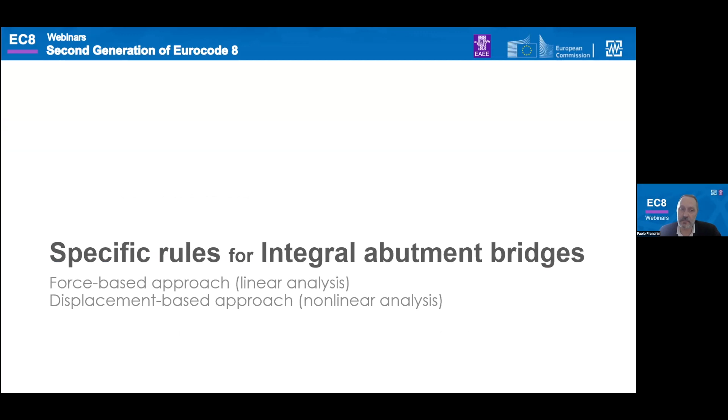Integral abutment, cable stayed, and extradosed bridges. These are clauses 9 and 10. Clause 9 on cable stayed and extradosed bridges is very short, 2 pages. I will deal with it at the very end, and I will focus on the more substantial clause on integral abutment bridges. So first of all, the scope.

Clause 10 should be used. Let me see if I can... yes, here, sorry, is the pointer. It applies to integral abutment bridges, but it's also permitted its use for semi-integral abutment bridges.

Semi-integral are bridges like this, for example, but in reference to the presentation by my colleague David, these are all those bridges where an abutment is connected with the deck and exchanges forces, so that deck vibration engages the backfill or natural soil behind the abutment. So not just this example, but there are alternative examples.

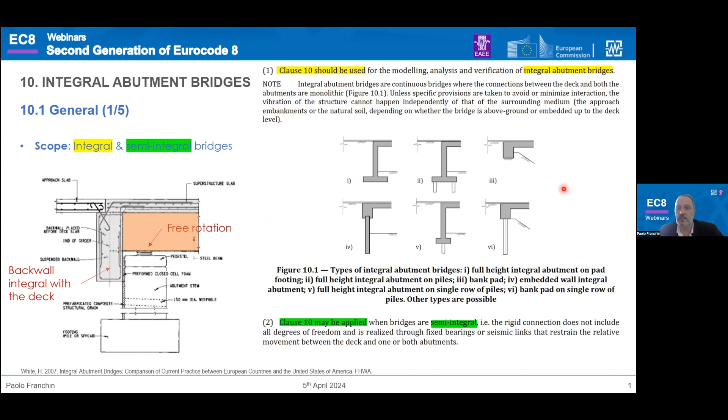There's a very large number of configurations for integral abutment bridges. Some are shown at the beginning of this clause. What is important to keep in mind is that whatever the configuration, the specificity of these bridges is that soil structure interaction is something that, unlike other bridges where you can sometimes model them as fixed base, here must be considered - it's a distinctive feature of these bridges.

So the global dynamic equilibrium of these bridges, the vibration cannot happen independently of the surrounding medium, unless the clause says specific provisions are taken to avoid or minimize interaction. When we say something like this, what we mean is solutions that have also been tested in shake table tests, exploring, for instance, having compressible inclusions right behind the abutment wall.

So in these cases, of course, the interaction with the backfill is limited, and the method that I presented in clause 10 needs to be modified.

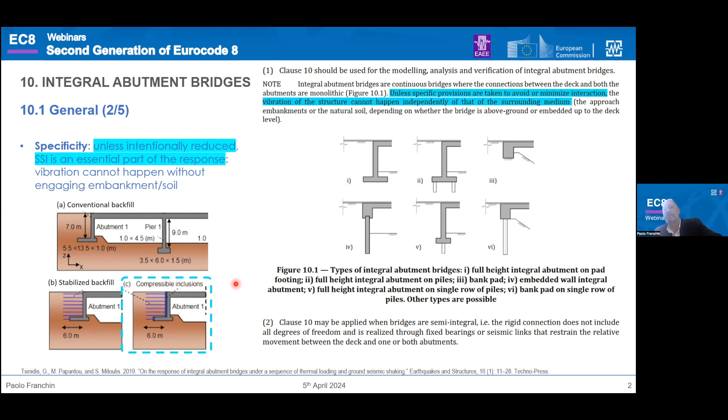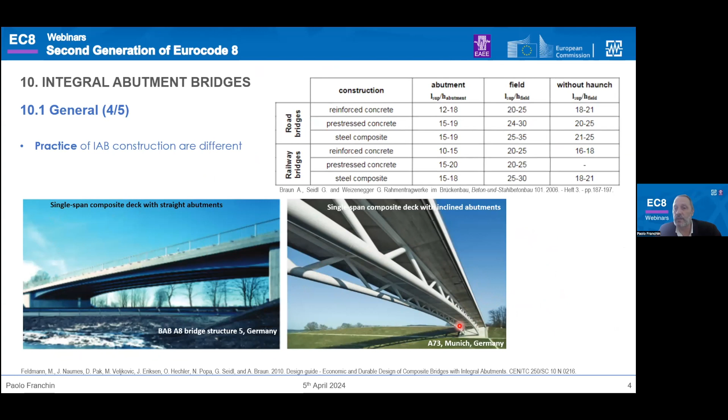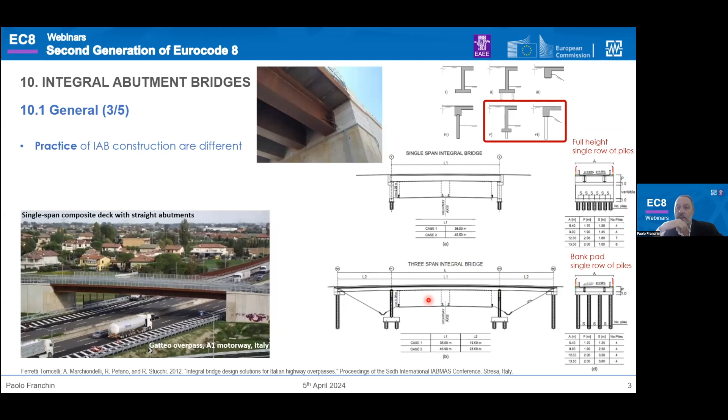And I should have mentioned that in the 3-span case in Italy, where I'm speaking from, it is common to have the deck sliding over the intermediate piers, but there are also cases, like the Slovenian practice, at least I'm aware of, where the deck is in concrete and the piers frame are monolithic with the deck.

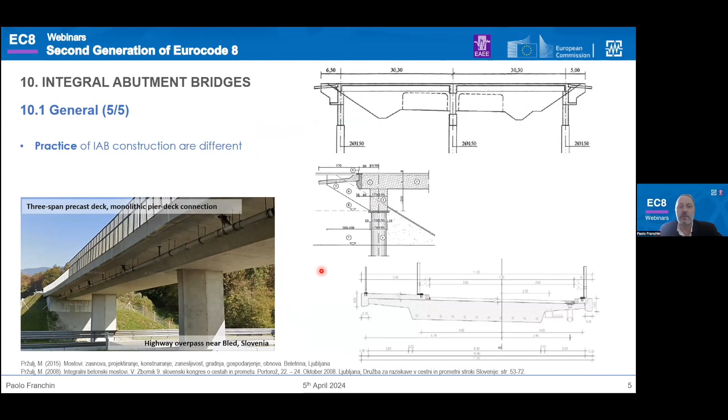So this clause needs to cover all these cases. So let's go to the basis of design.

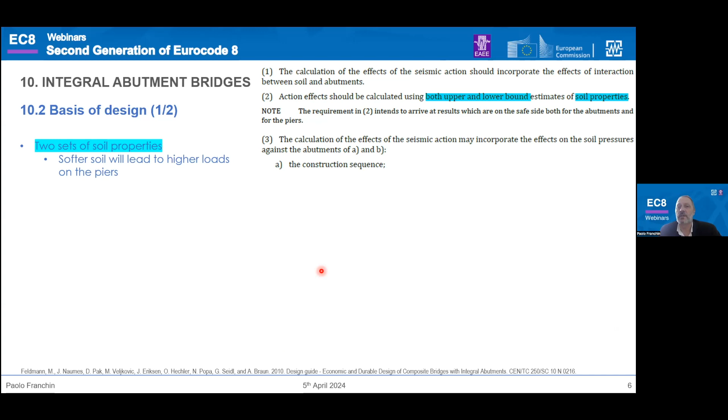Since interaction with the soil is an essential part of the response of these bridges, like it usually happens when you have to deal with soil that is more difficult to characterize than artificial material, it is wise to use upper and lower bound soil properties.

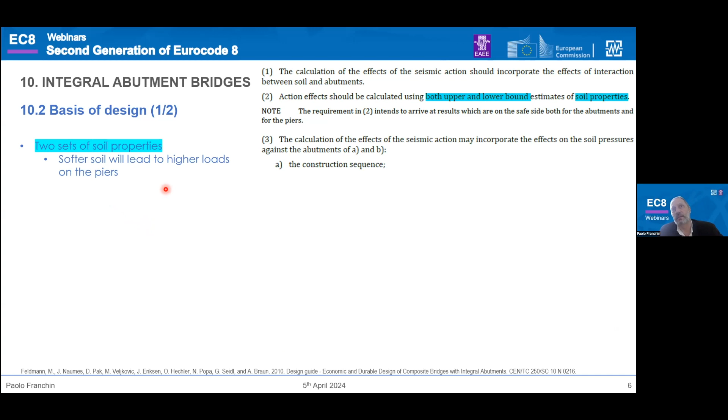So you need to analyze everything with 2 sets of soil properties, because, for instance, considering lower mechanical properties for the soil will increase the loads carried by the piers, especially when they are monolithic with the deck, and higher mechanical properties will increase the internal stresses on the abutments. So you need to consider two. This is a should, a recommendation.

Then there is a permission to include in the calculation of the response the effects on the soil pressure of the construction sequence. This is important - true in general for all large structures, but in this case, even if they are not large, for these bridges, the construction sequence influences the internal forces at the end of construction, and this may lead to different initial states of pressure behind the abutments.

And thus influence the starting point for the dynamic analysis. This is mainly something that you can do when you perform a displacement-based analysis approach and perform a nonlinear analysis. In the simplified force-based approach, you cannot consider this.

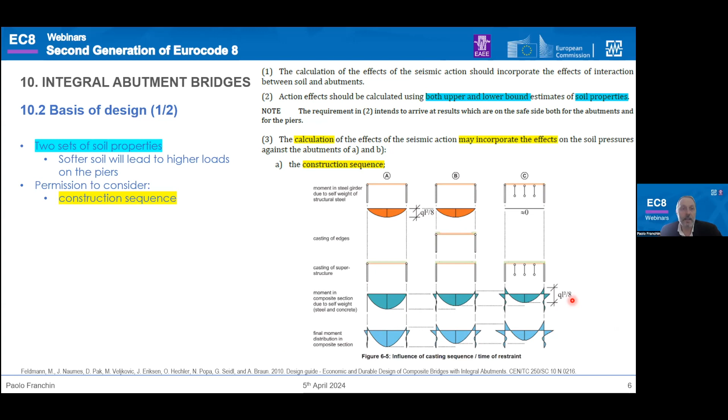You will see why. Also, there is a permission to incorporate the effect of thermal cycling. Actually, now we are dealing with the seismic design situation for this type of bridge, but most of the initial research on these bridges dealt exactly with this problem - the fact that these bridges are in contact with the soil at the abutments, and through seasonal variation, winter, summer, they have compression, elongation and contraction of the deck that brings interaction with the abutments.

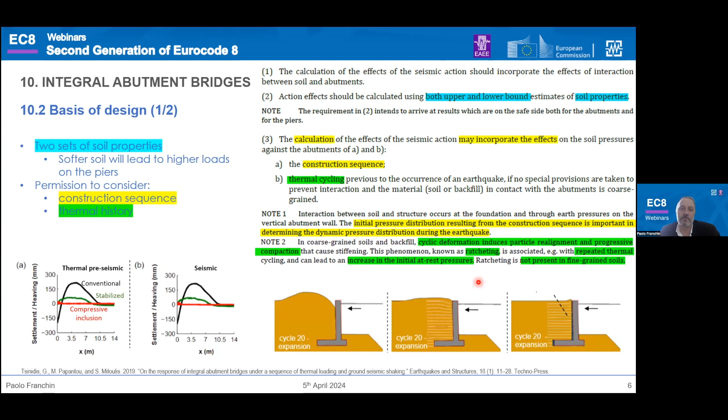And depending on the structure of the backfill, you can have, in a number of cycles, considerable deformation, increase of the pressure behind the abutment, and deformation of the soil. This is an example from work exploring this. So depending on the type of backfill you have, you may want to include these cycles before the seismic analysis for the displacement-based approach.

Now, whatever the method of analysis, the main feature is the interaction. The actions should come from the kinematic compatibility between the soil and the structure. This means there are displacement-dependent soil structure, soil pressures that need to be accounted for.

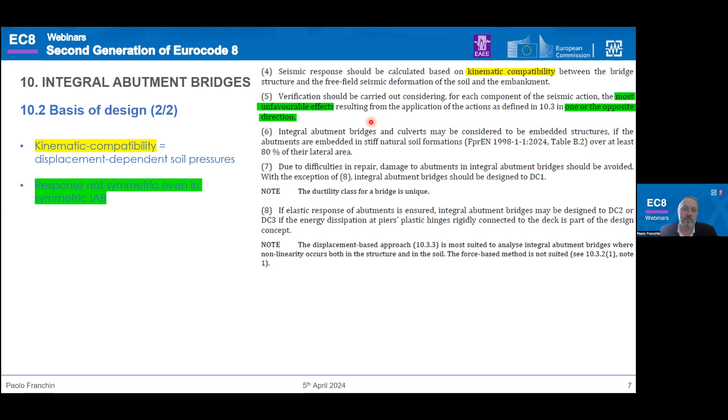Further, even for a symmetric bridge, the response is not symmetric, because the bridge will move away from the soil on one side and lean against the soil on the other. So you need to consider both directions. You cannot just mirror; you have to consider both directions of analysis as usual.

And this is a very important aspect, consistent with what I was saying at the beginning: critical zones, areas where energy dissipation occurs, should be easily reachable for the purpose of repair. Typically, especially if you have tall abutments, these bridges' abutments are not easily accessible for repair unless you dismantle the entire embankment or portion of soil behind the abutment.

So the target performance set by the code for these bridges, for the abutments and therefore for the whole bridge, is a quasi-elastic response. This is a very important statement. And therefore, you have to design the structural part of the bridge for DC1.

The exception to this is when, like in the Slovenian practice, you want to use energy dissipation in the plastic hinges of the piers as part of your design concept. In that case, you can design these hinges, only these hinges, provided you still have quasi-elastic response in the abutments. You can design the piers for plastic hinging to DC2 or DC3. Of course, this requires some manipulation to do with the force-based approach, since the code doesn't say how. The best approach, if you want to design a bridge like this, is to go for the displacement-based approach.

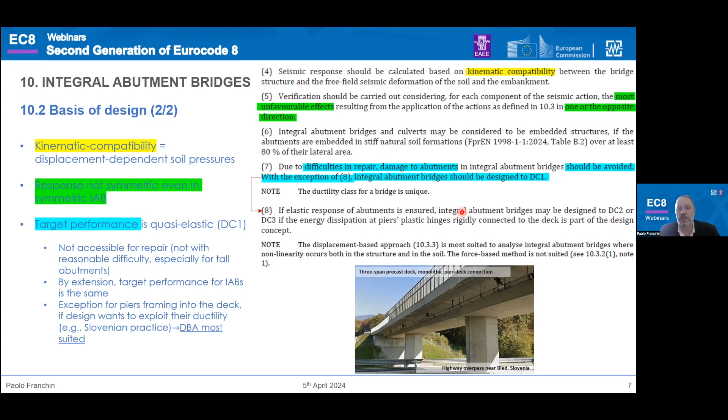So two methods are presented for analysis of the action effects: one is the force-based approach, and the other is the displacement-based approach. Starting with the force-based approach, consistent with the target performance which is DC1, one can use a Q factor of 1.5, which basically coincides with QS, the overstrength factor.

Note one important aspect of this: the design of these bridges, since the response is the result of the interaction between the bridge and the soil, we are not using the reduced spectrum like we usually do in the force-based approach. So we are not dividing the spectral acceleration by the Q factor. We are using the full spectrum, to find a configuration of equilibrium between the inertia of the structure and the soil pressures. Then, for the purpose of designing the structural elements, we divide these internal forces by Q.

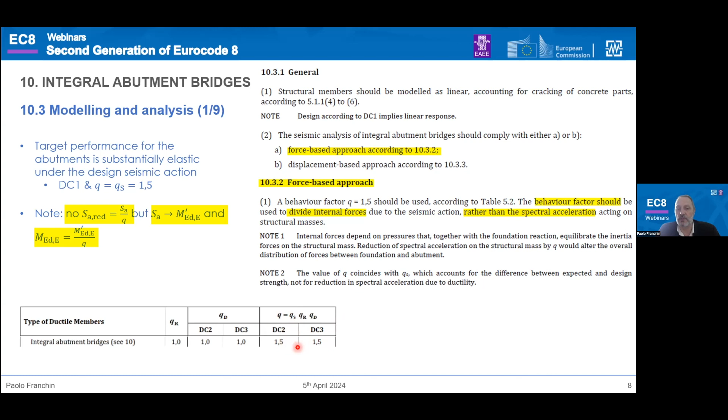In the end, for the structural members, it's the same, but the displaced shape and the pressure on the soil will be more realistic. This just shows internal consistency: the fact that for these bridges, even for DC2 and DC3, now you understand why the total Q is equal basically to QS, equal to 1.5.

So how do you perform the force-based approach? You have to apply total... so rather than modeling the soil in the force-based design approach, you replace the effect of the soil with earth pressures. So the problem is how to decide this earth pressure.

Now, this earth pressure in the code - you don't need to superimpose the static pressures coming from the construction sequence. It would be difficult to determine, especially because of the phenomena we talked about before, and the seismic one, like it is sometimes done for retaining structures.

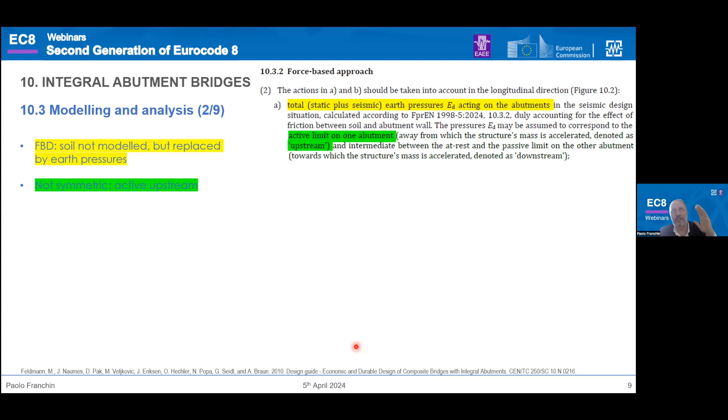What you need to do is apply a total static plus seismic earth pressure acting on the abutment. Now, these are not symmetric, because the bridge moves away from the soil on one side and leans against the soil on the other side. So on the upstream, or moving-away side, you very easily go into the active limit pressures, because the displacement corresponding to activation of active limit pressures is small, while on the other side you go to some state of passive pressure.

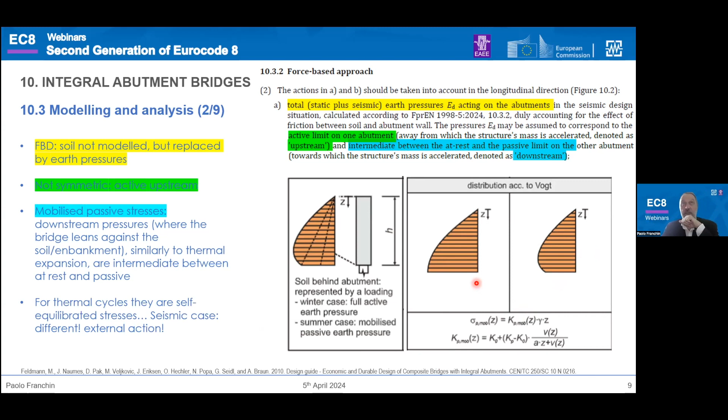Now, for the thermal cycles of contraction and expansion, these are self-equilibrated stresses, so you need iteration. The seismic case is different because you do have an external action, something pushing the structure against the soil. So in a way it's simpler - you don't need iteration. What we do is start from the intensity.

The higher the seismicity, the higher the seismic force pushing the deck, the structure, and the abutments towards the soil. We normalize this intensity. Please note that the inertial forces on the structure that you need to apply are equal to the mass of the bridge times the plateau spectral acceleration S a.

Now this is a considerable simplification. The reason for doing this is the following: first, there are a lot of nonlinear dynamic analyses that have been carried out to support this, and this is from a parametric study with a number of bridges of this type with different numbers of spans. I will show more later.

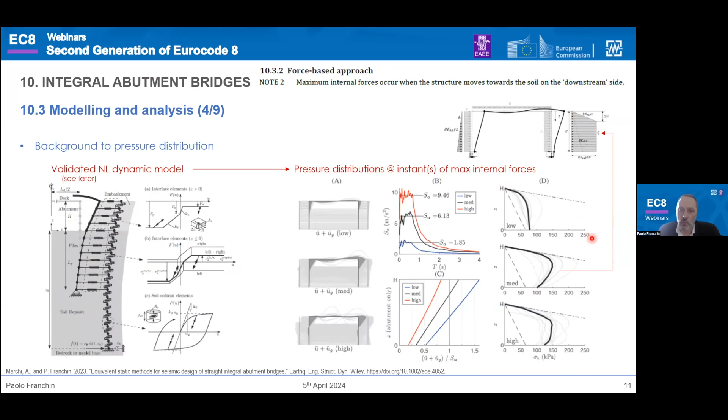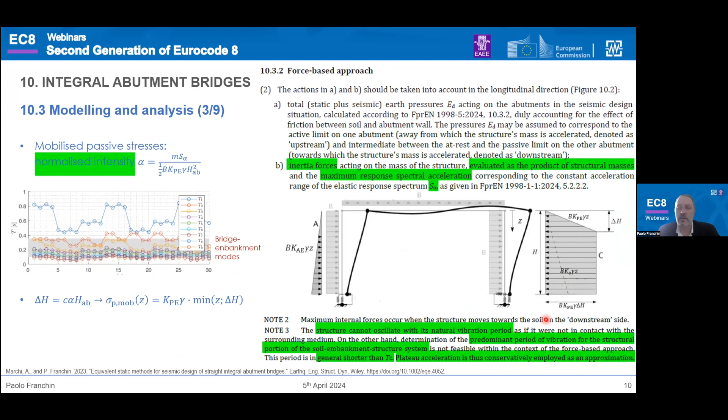And what you get, as reported in the previous slide, is that you have maximum internal forces when the structure is leaning against the downstream embankment.

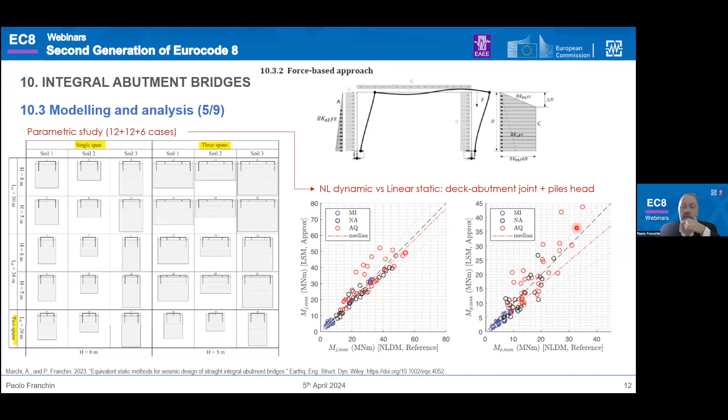A parametric study of a large number of cases was carried out - single span, 2-span, 3-span bridges, different pile lengths, different soil profiles - and the results of this linear static method with equivalent stresses were compared against nonlinear dynamic analysis, and as you see, the correlation is quite good.

As I said, the foundations need to be included, of course. Otherwise, if you model this as fixed base, it will not lean against the embankment. This is one case where you also have to include the foundations, and you can do this according to Part 5, Annex D, which gives expressions for foundation impedances. Here, just as an example, I'm showing expressions for single piles, but the foundation might be shallow.

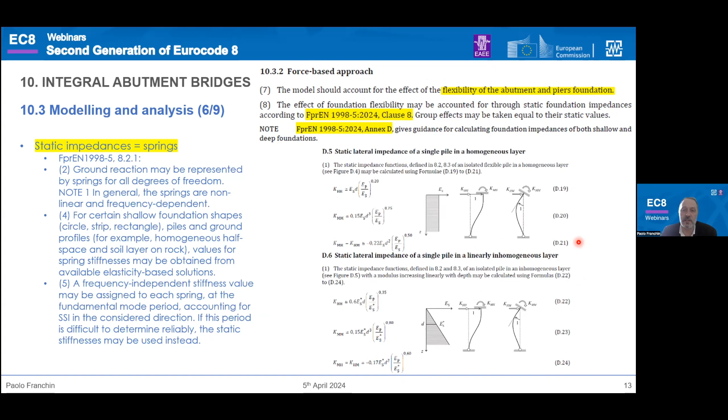As we've seen, there are different ways of building an integral abutment bridge. And of course, what is important to recall is that if, for instance, you have piles, then you will get forces in these impedances, the springs, and then you will have to apply these forces to an appropriate model for your piles in order to determine the internal force distribution in the piles.

This is important because it's not necessarily at the top that you develop the largest internal forces, and you may even develop internal forces that are too large in terms of required reinforcement, so you need to increase the number of piles, even if from a geotechnical point of view, under static loads bearing capacity and settlements, the piles are enough. You may need to increase them for the inertial forces.

What else? The transverse direction. It's mentioned, but it is much easier because most of this interaction occurs in the longitudinal direction of the bridge. This is true in almost all cases, but you have to pay attention for those cases where...

So if you need to carry out the analysis in the transverse direction, you just have a deck that is restrained by abutments that can be considered rigid over their height in this respect, and consider the rotational stiffness of the group of piles. This is what is said here in this point 11.

Unless, of course, your abutment is quite flexible. There are cases where integral abutment bridges are built using as an abutment a sheet pile retaining structure. In this case, this assumption needs to be relaxed, and you need to account also for the flexibility of the sheet piles. You can do two separate models, but in the case of skew bridges, you need to use a spatial model.

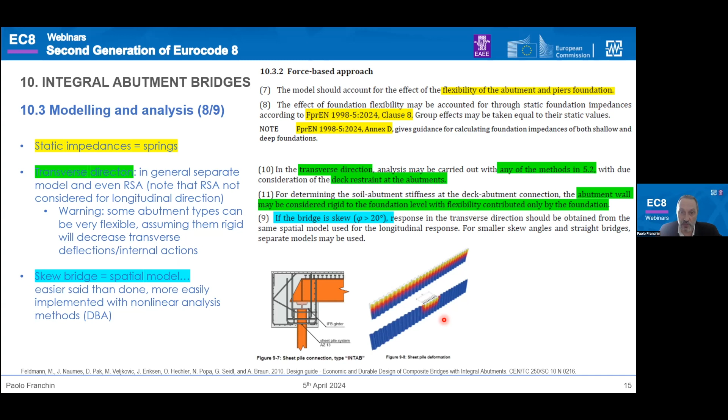Now, going to the displacement-based approach, this is treated in a very short, compact manner in the code, because most of the material is in an informative Annex D. This approach is implemented either through nonlinear static analysis or response history analysis.

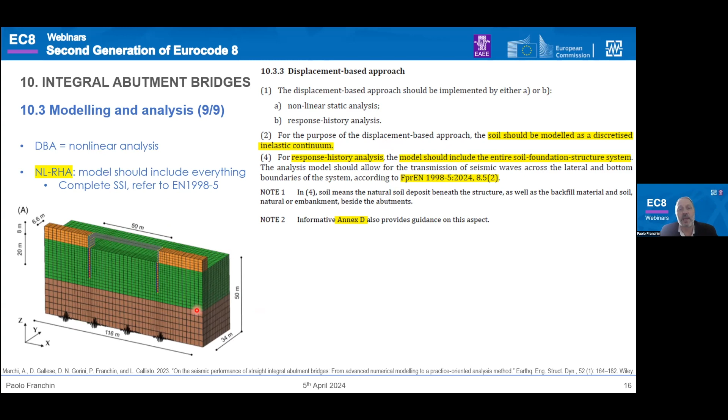In general, you should discretize the soil domain, which is an inelastic continuum, and model it. Response history analysis should include the entire system, somehow, not necessarily such a well-defined model. In the case of nonlinear static analysis, you can simplify this.

In general, however, we won't go for models of this level of refinement, and the code opens to mutually independent inelastic springs. This means basically a Winkler approach. The relevant material to implement such an approach is given in informative Annex D, which I will detail right after this. I wanted to mention this paper by Greimann and co-workers from 1986, so in 2 years it will be 40 years old.

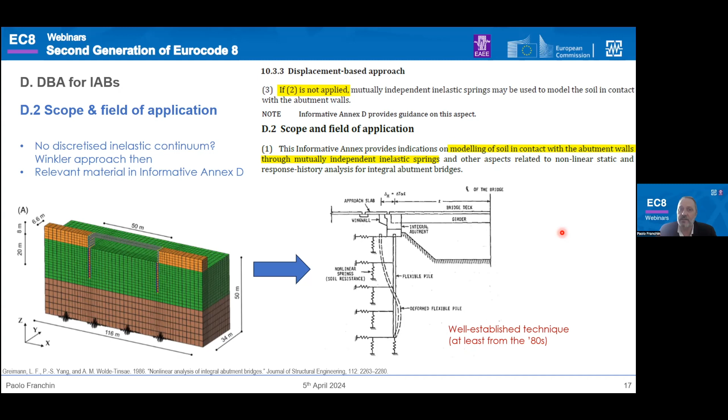This inclusion of these methods that seem relatively refined was discussed a lot within the committee, and this is just to say that the application of these nonlinear Winkler models to the analysis of integral abutment bridges is by now a well-established technique. It's something that has been around for almost 40 years. So let's go to Annex D.

Annex D talks about modeling, as I said, for nonlinear analysis with the Winkler approach. One important thing that is said is that we are used to Winkler for foundations, with a constant spring at the same depth. Here we must use depth-dependent horizontal springs, because the stiffness of the springs, and most importantly the strength of the springs, depend on the confining pressure.

The constitutive law should be composed of at least 4 linear branches. These are compression-only springs, in theory, going from the active to the passive limit with 2 different stiffnesses. The code says at least 4 linear branches, but allows approximating it as a 3-linear spring, importantly with the passive stiffness, because it is more important, since the maximum internal forces occur when we lean against the soil and activate the passive side, so we need the correct passive stiffness.

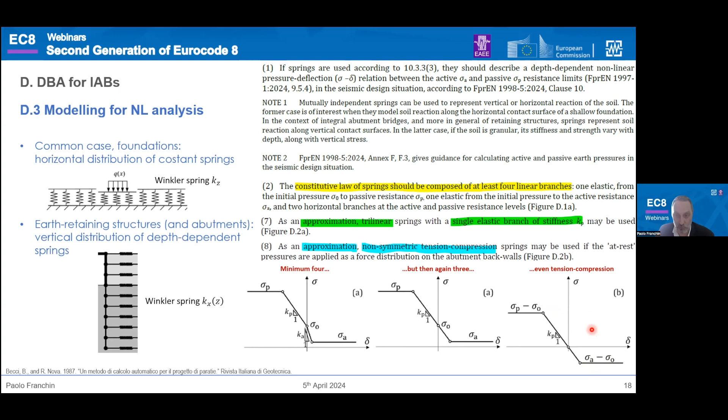If we have to approximate, we don't want to use the active stiffness, but the passive one. This relates to a question I've seen before: how do you implement this in a commercial program, unless you have a program that allows you to define springs that do not pass through the zero point? For instance, the well-known SAP2000 program does not allow this; all springs must pass through zero. In order to do it in such a commercial program, you will have to correct the springs by subtracting the at-rest pressures, and apply the at-rest pressures approximately with a triangular load distribution. So this is allowed.

In terms of stiffness, expressions from the literature are given for the active and the passive stiffness. These lowercase K are the stiffnesses, and then you have strength, of course. Now you see here uppercase K, which are the coefficients, the earth pressure coefficients.

The strengths for these springs are not given in Annex D of Part 2. These are given as an example in Annex F from Part 5, because these are the same ones used for other earth retaining structures. And of course, the passive and active coefficients are those for the seismic design situation. That's why it is KAE or KPE.

And of course, it is said that in computing the stiffnesses, these are stiffnesses secant to the expected level of deformation. So the soil modulus, the soil Young's modulus, should be reduced with respect to the initial one, and you can use the same tables that are allowed for the reduction of the shear modulus in Part 5 to do this operation.

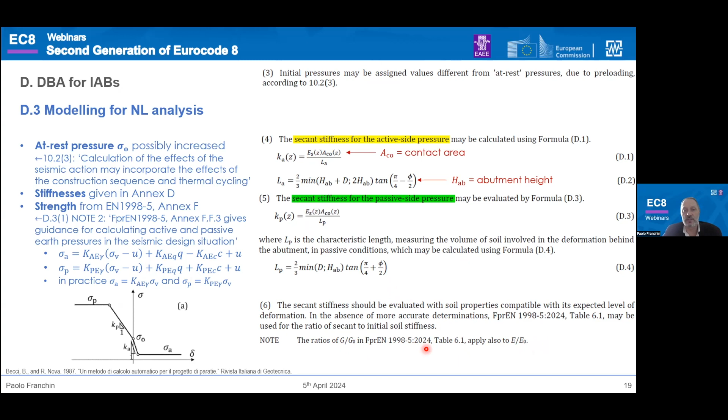When you do nonlinear static analysis, basically the model is the same for the structural part that we have seen before. Impedance is at the base. Linear structural model, because that's the type of performance that we expect, that we require for this type of bridges. But then we have to add springs like those that we have just described. And these springs, of course, the soil side of these springs will not be fixed.

To be more precise, it should move, and it should move in order to... let's say, if you don't do this and you push against a fixed soil side, you will have a higher internal stress. So it would be conservative to disregard this.

But in general, you can perform, even with a commercial program, an analysis where you increase at the same time a force distribution, which will be the inertial forces, and a displacement profile. The displacement profile is the deformed shape of the embankment or natural soil concurrent with the vibration of the structure.

And the code gives approximate expressions for this displacement shape. These are the modes I was talking about before. You see that the fundamental mode of the system usually is one where the entire deposit is moving and the structure is not very much deformed, and maximum internal forces occur more due to modes which involve the upper portion of the soil and the embankment.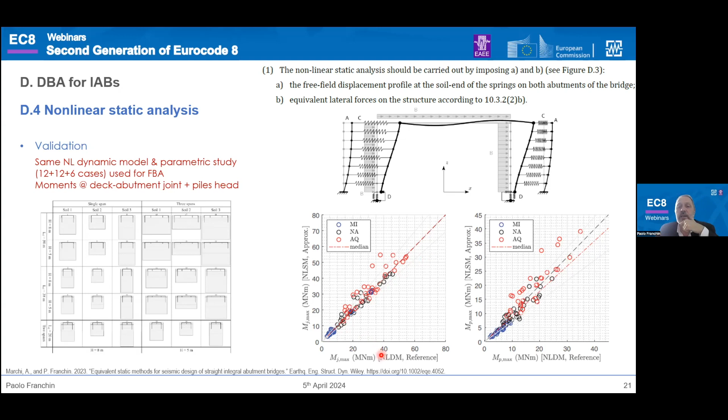These methods have also been tested in the same parametric study on a large number of cases, and of course, being nonlinear static and less approximate than the linear one, when compared with the dynamic one, they perform even better.

Now, nonlinear response history analysis. This is the same type of springs. In this case, there are some indications about the soil columns that one should use, and the input in this case is to be given at the base. Mostly things are done as described for site response analysis in Part 5, and reference is made to Part 5.

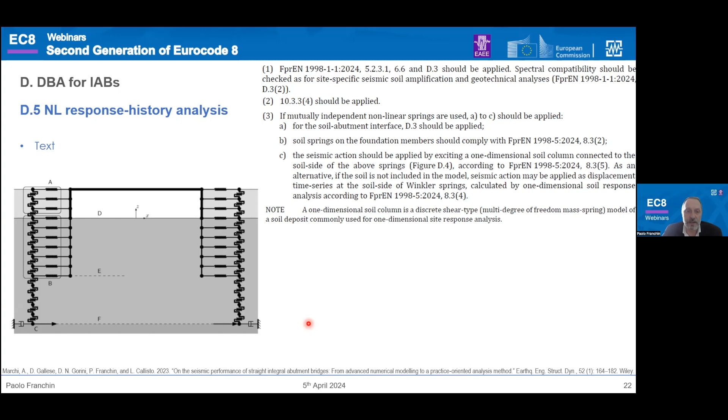This is just a slide to give you a glimpse. The fact that this type of modeling, that is response history, has been checked versus higher order, high fidelity complete nonlinear models.

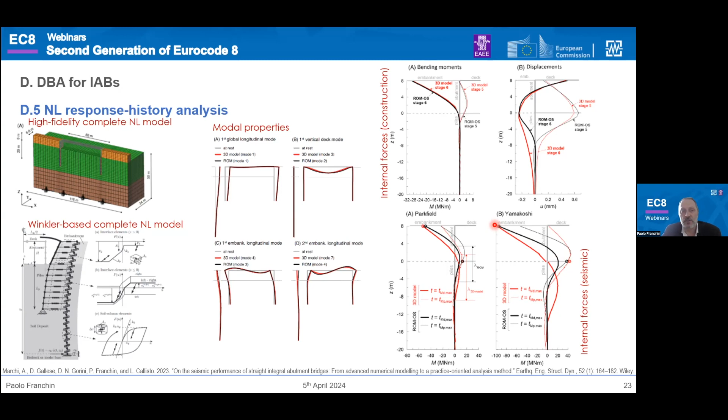Very limited check, of course, but these show modal shapes, bending moments or displacements at the end of the construction stages, bending moments and displacements at the times of maximum moment in the piles or in the deck joint interface, and you see that there is strong support for this type of Winkler-based models.

Of course, you can carry out nonlinear response analysis also on a three-dimensional model. In that case, you need this, and this is necessary when the bridge is skew, and you need to not use a single layer of springs, but you need to separate these along the width of the abutment. And this is also something that is well established.

And for instance, it has been shown to work very well against measurements in terms of traffic loads. So the modeling has been checked not only versus higher level finite element models, but even versus experimental measurements.

Sorry for being long, just a few 3 or 4 slides on cable stay bridges. Very well known and beautiful examples, these are landmarks. Now these types of structures are characterized by a strong dependence of the initial stiffness matrix.

For the dynamic analysis under seismic action, the stiffness matrix depends on the construction sequence. This is just a glimpse of how one does this. It's possible to be carried out in any commercial program. You really need to follow the construction sequence to have the correct stiffness matrix at the end.

In this case, before in other clauses we saw, for instance in integral abutment bridges, it was a permission - you may consider the influence of construction sequence because it's important, not that important. In this case, this is a recommendation - you should consider the influence of the construction sequence.

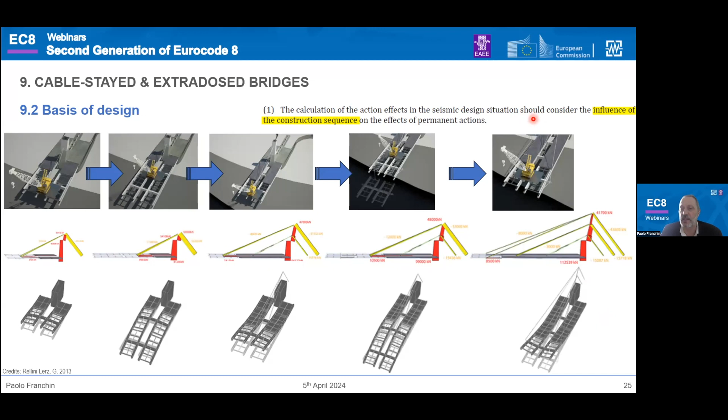Then we have a very strong statement - as I told you, just 2 pages but strong statements. There is a recommendation to use response history analysis. There is an exception for multi-mode equivalent response spectrum analysis in low seismic action class.

But in general this does not seem like a very demanding recommendation, because as I said these bridges are usually major bridges and they are already analyzed with higher refinement. So asking for response history is not an excessive recommendation. Of course it is also recommended to use a 3D model with second order effects and all this stuff.

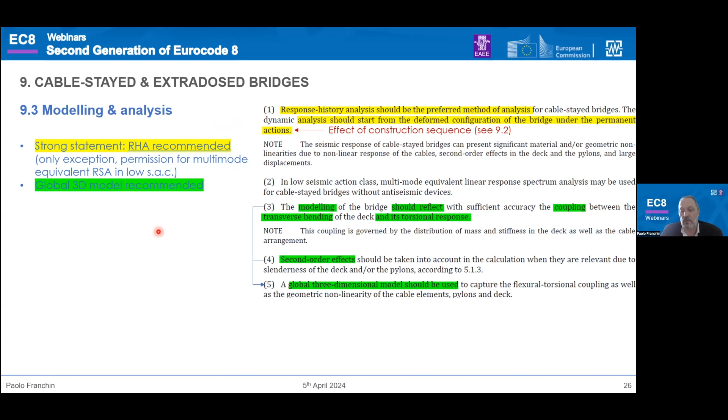Another important reason for performing possibly nonlinear response history analysis is that damping is not proportional. You usually have structural damping maybe at 5% or less, but damping of cables is often much smaller. On the other hand, you may have anti-seismic devices that can be employed, for instance, to restrain or limit the displacement of the deck with respect to the pylon, or to connect the pylon and avoid pounding.

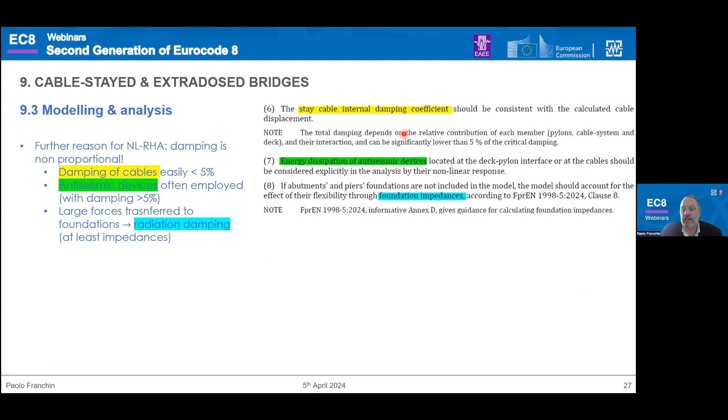Since you also have pylons that load the soil with very large structures, the load transfer at the foundation in this type of bridge is very large, you have important radiation damping. So this is one case where it is said explicitly that you should use response history analysis, possibly nonlinear, and model soil structure interaction, at least through foundation impedances.

This is in the verification. There is actually, as with the performance requirement, it is said that this structure should be designed to remain elastic under the design seismic action. This may seem a very strong recommendation, but really these are usually longer period structures, so it is easier for longer period structures to remain elastic because of the lower...

These are flexible structures, so large displacement but flexible structures, and usually this is the case I was mentioning - you use anti-seismic devices at the connection between the deck and the pylons. This is the case from Greece, the famous Rion-Antirion bridge. This is because the cable system usually provides stiffness in the longitudinal plane, but very low stiffness in the transverse plane, and so you need to engage the two to avoid impact with the pylon.

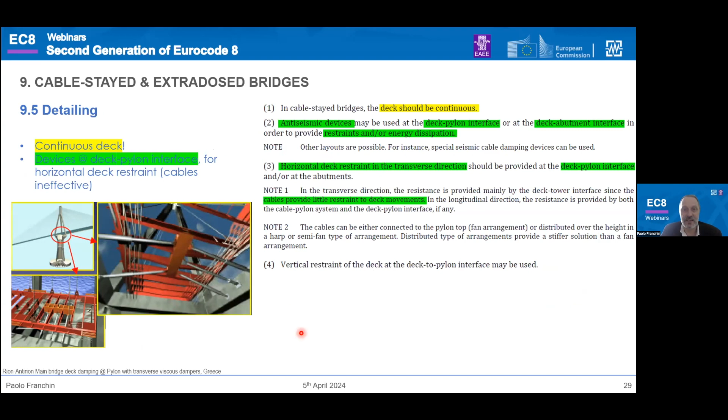This is just saying what I just said - I didn't remember the slide, what's going on with this. So I think I am done, and I'm sorry for taking long. I'm open to questions.

I don't see you. Okay, so thank you again for the second presentation. I'm checking the chat - there are no questions so far.

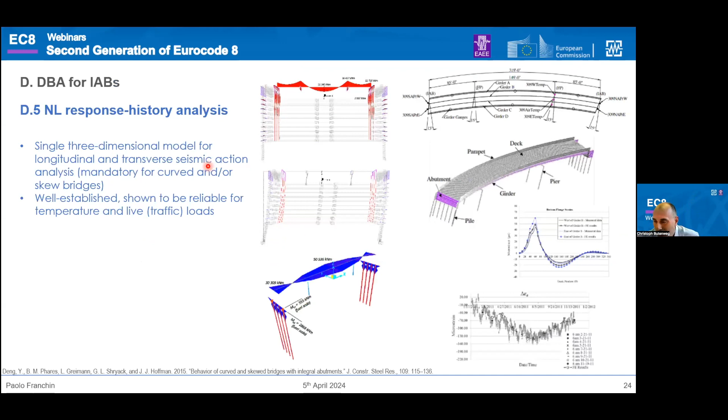I have a short question regarding the design philosophy. So what you showed for abutments was also with pile foundations. I have not so much experience, but do you think it's a good strategy to avoid damage to piles by strengthening the backfill contribution, in order to decrease the forces in the piles?

So this is one of those cases, for example through mechanical stabilization. As I have shown at the beginning, there are possible very many different configurations of integral abutments, and we should consider the whole system and the backfill. The backfill could be stabilized through geotextiles or stabilized with cement, so we can really work on it, especially since these bridges could also be embedded.

But in the case where you have an approach embankment, you can really work on the embankment material. And you have the possibility of realizing a compressible layer, a buffer between the abutment wall and the backfill. Now this is one of those cases where the design is interesting because you have concurrent and opposite requirements coming from one action and the other.

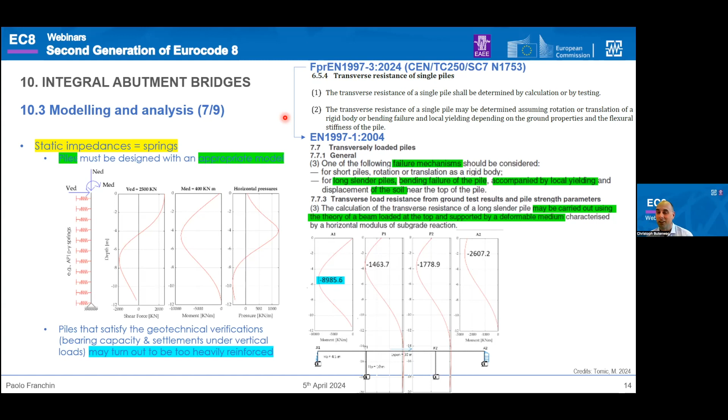Indeed, over to Rita. Okay, so you have to close your presentation. Yeah.